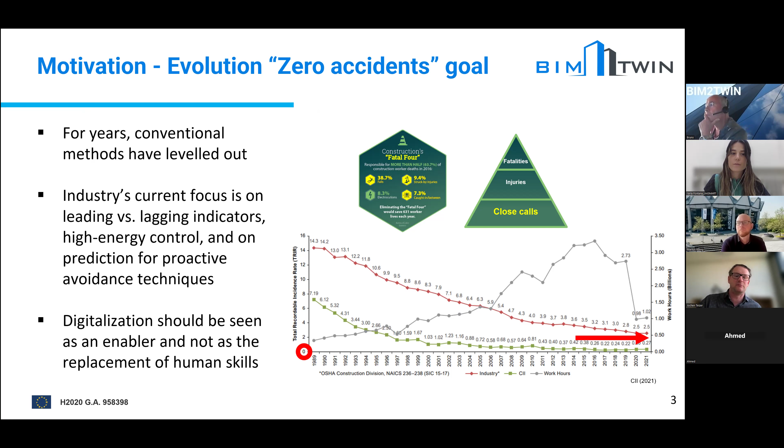Actually, it's going into high energy control events and actually also prediction. Prediction is very suitable for digital twins, as we know, as we can process data. And that will hopefully help us bring this curve further down to zero. As we know, safety has been leveling out for the past couple of, almost two decades now. We need to take the next leap and improve things. And that's where a digital twin really comes in handy.

To tell you a little bit more about the digital twin that we have built, I know this graph is very busy, but you have here a construction site. Actually, work package 7 in BIM2TWIN produces alternative construction plans according to the lean construction method. We can evaluate those alternative construction plans, let's call it schedules, and evaluate them for safety. So this is where we focus on artificial intelligence to evaluate safe construction plans for safety. We call this tackling the prevention through design and planning principle.

In addition, we also want to, of course, focus on understanding what is going on a construction site. That's where we have raw data streaming in. Here we focus on sensors, whether they are vision-based or wireless sensors or wearables that provide us with data about the workforce and equipment that's moving around. Even that data can be analyzed and used for predicting probably future events. So you will see a little bit on that.

Of course, we want to relate this information back once we check with according to rules to the end user, which is then shared again with the construction site. I think we have numerous publications among the entire BIM2TWIN team. I would encourage you to read up on that and maybe even contact us. But I'm not going into further detail. There are underlying business processes that we have evaluated in the BIM2TWIN project to really figure out what data do we need, what information can we generate, and how can this eventually be used as future knowledge.

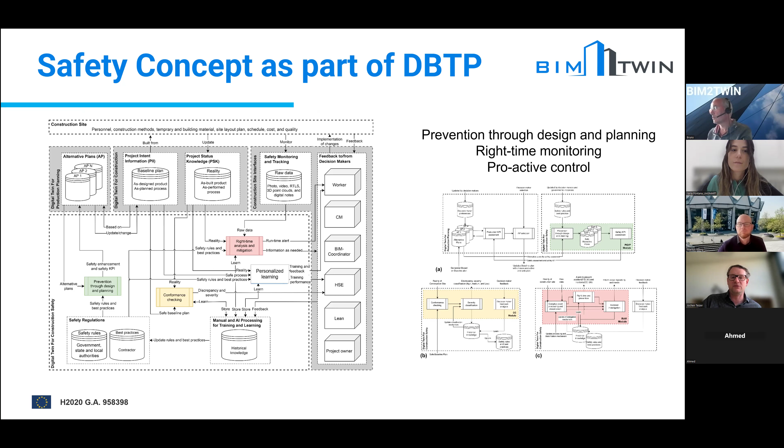So I'll show you two parts. One is the safety planning, and the other part is proactive monitoring and control. I'll stick just to those two. The objective of safety planning is to design out known hazards from construction scenarios, from construction plans. So often these relate to rules. I'll show an example in a second.

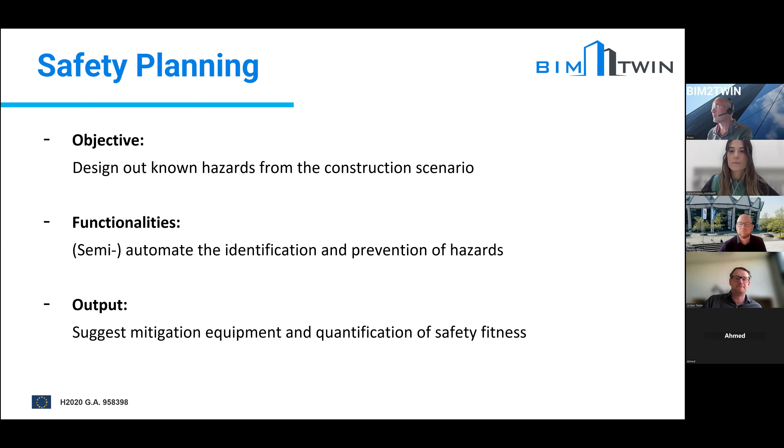And second, we want to come up with a semi-automated way to identify these hazards and actually eliminate them before we go into the construction phase. So, the output is then, of course, we want to almost automatically suggest mitigation measures, equipment, safety equipment that protects the workforce from getting hurt. I think if you understand these parts, then I can show you the next couple slides.

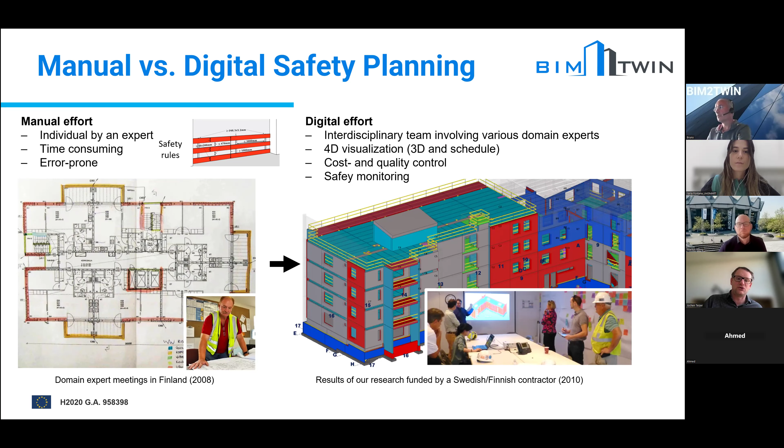This is how it's done currently, planning safety manually, like on a drawing. And yet we want to go to that phase where we actually utilize building information modeling, figuring out where fall-from-height hazards are and actually creating fall protection equipment automatically in a BIM model and linking that to the schedule. Now, to show you this, I hope you can see it, and the video is quite smooth.

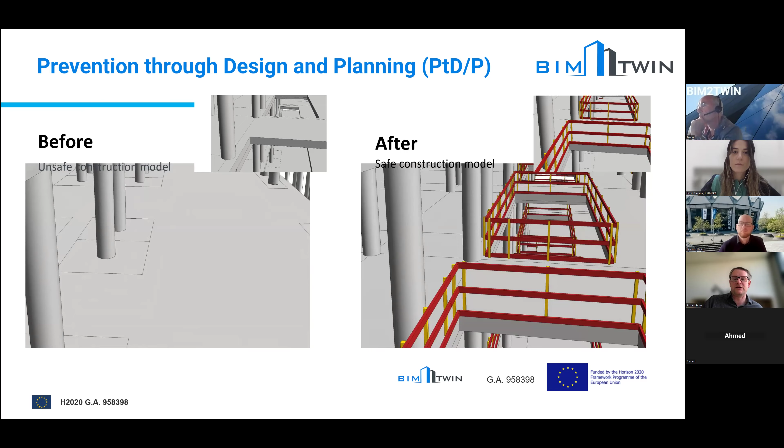Typically, you have this in a construction plan, a model, but it doesn't carry any safety features. So here we actually, once we run our algorithms, we can detect these fall hazards and automatically install these guardrails. And I think that's a first result or contribution that we've been making with our work package in BIM2TWIN: we can detect these fall hazards and either put guardrails there or other protective measures as the user wants to have.

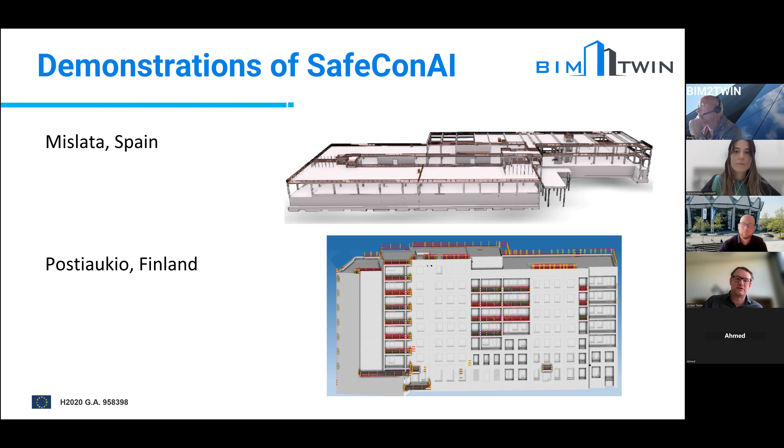I move here to the next slide. We have, of course, multiple demonstrator sites in the BIM2TWIN project. One is in Spain, one is in Finland, and we have applied these tools there to generate these safety plans, or safe building information models. So it's a very nice way to actually incorporate safety and leverage the already ongoing effort of utilizing BIM for construction projects.

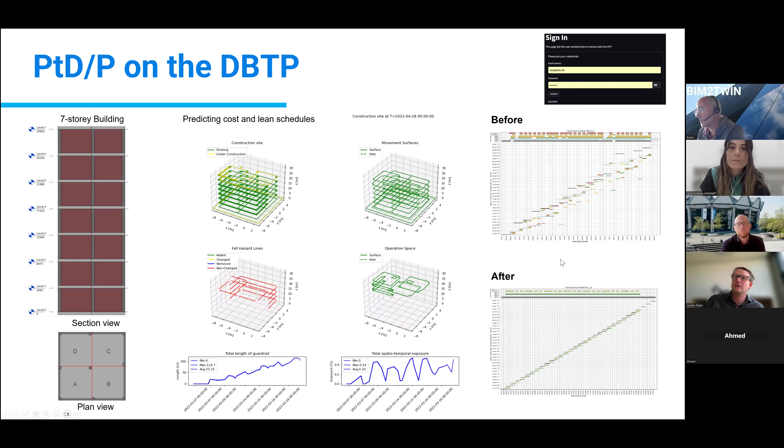I think this is some basic takeaways from what we've been doing in BIM2TWIN on the safety planning phase. We call our approach SafeConAI. And as it ties to work package 7, typically we have a construction schedule as shown here, and we know that this is probably not as efficient as it could be. The one below is probably a bit optimistic, but technically, based on work package 7 and our contribution, we can incorporate safety. It's very small to see here, but we include safety, so we know when safety issues occur and how quickly they have to be fixed. And likewise, we can streamline the operation and make it lean, reducing further waste. That's something that is a result of the safety planning part of our work package.

Going to the next part, having this plan here, it would be nice to actually monitor if we're performing that well as we initially thought. And here we have the objective in this part of the project of monitoring real-time safety as it is practiced on the construction site.

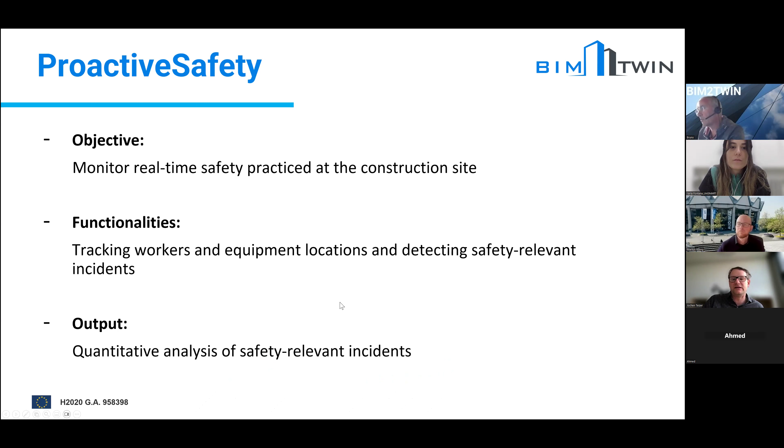So here we track workers and equipment locations and detect safety relevant incidents, and the output is a quantitative analysis of what has happened on the construction site. Let me show you a little bit of that.

Here you see a model. This is also a result of our safety planning phase. We take a model and enrich it with the work spaces. You see here in the light blue color, the work area of workers.

Here is a fall hazard because the work crew is walking on that end. You see there is no prefabricated wall element installed yet, so you can drop at least 2 meters, as we've experienced in a field trial on the site.

So workers could be exposed in that part of the job site to these falls. Now, how can we ensure that workers don't drop, or record that they don't get too close? We can put wearable tags on them, which we've done using RTK GNSS tags. These are tags that can track to centimeter accuracy where workers are, of course only in the outdoor environment.

It works like you set up a base station that provides the corrective signal, or you use an online service, that's also possible. But in this case, we developed our own base station and installed it. Likewise, we also installed a camera on the crane hook, on the trolley, facing downwards.

This was to also figure out, can we detect using computer vision any workers below a heavy load? Because of course we would also like to avoid that. You will later see more from Markus about computer vision.

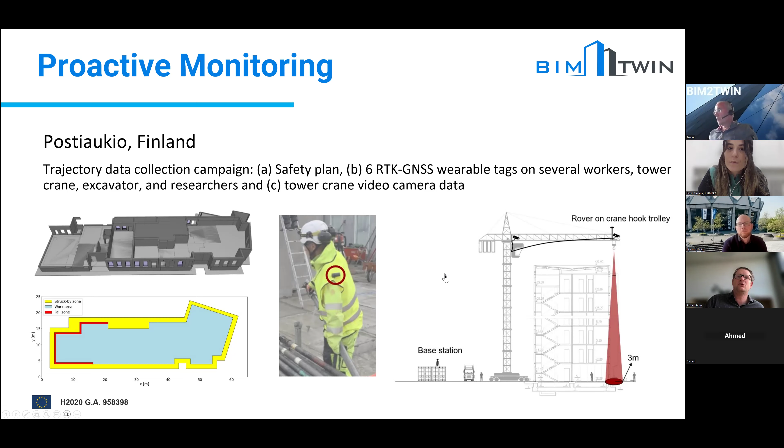I'm not going into that too much, but this is raw video footage or images from the video footage. And then there are algorithms, initially provided by a partner in the BIM2TWIN project, that can process the raw footage and detect workers just below a crane load.

An incident you see here is probably that this worker might be exposed to this load hanging from the crane hook, and we want to avoid that, so they stay away. And that's exactly what we can do.

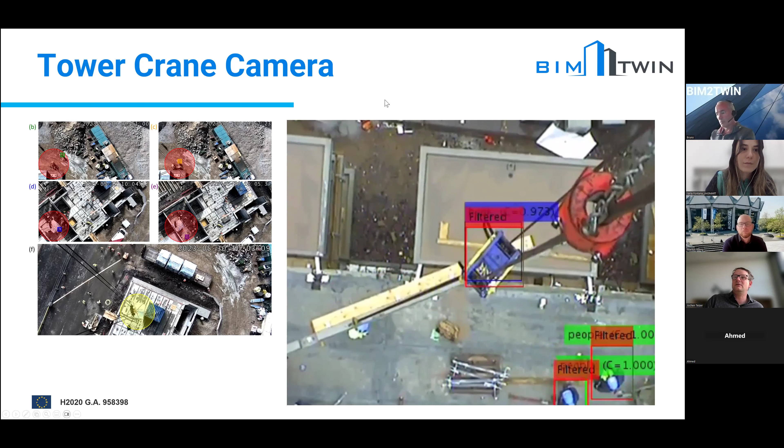Once we have georeferenced these images, we can map all the trajectories. So this is from the RTK GNSS data, all trajectories - this is from just 5 workers, all their trajectories throughout one day.

And you see their work area. So you can quite easily figure out visually that they have been working quite a bit in this domain.

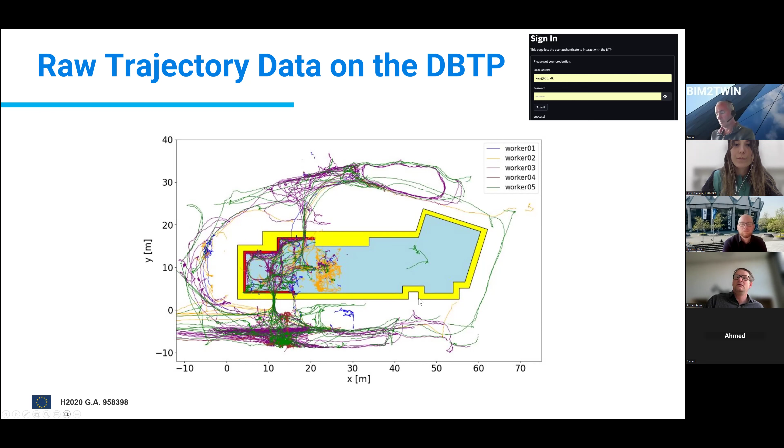And likewise, the crane hook can be visualized because we also have its position, since we also installed an RTK GNSS tag on the crane trolley. And we can bring that into relation to the work crew.

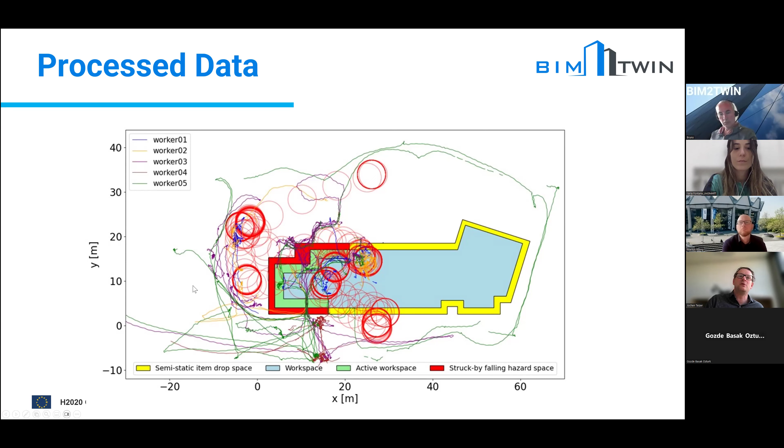Of course, here's another way to display it. You see it here on a plan view of the safety enriched BIM model. You see these locations, whereas the yellow ones...

...maybe not as serious. And of course, you're able to get a lot of data about the workers, like who of the workers was exposed at what time, and so on.

Now we're still in the process of analyzing how such data, or such information, can be shared with the workers in a better way. But our goal here is to use active personalized feedback, where we directly approach the individuals and tell them how important it is for their own life to ensure safe work practices.

I think this is it from my part. Of course, we have a lot more statistics about a job site and its behavior, but I think you get a glimpse of what is nowadays possible once you use technologies, Internet of Things, or sensors that provide data from the real construction site operations.

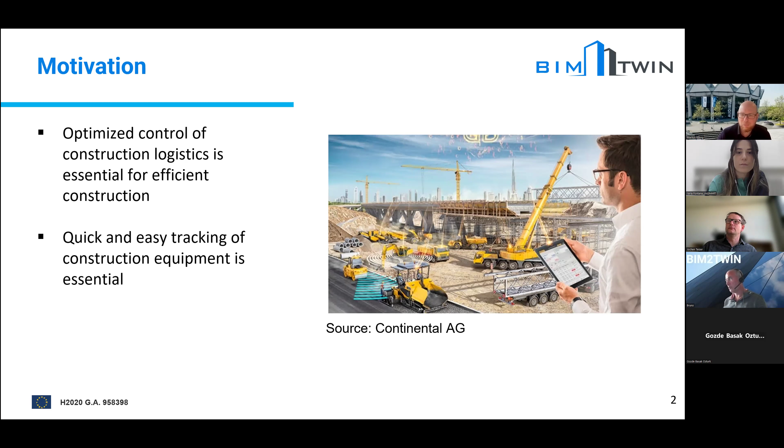So mainly I'm talking about tracking and monitoring of construction equipment at the moment. Several technologies are possible here. Sometimes you have machines with already installed sensors, so you can collect data directly, but very often we have equipment which is not that intelligent or digital, so you have to monitor it in a different way. Also here we are using computer vision based methods, installing a camera somewhere on the construction site.

Then starting the recording, try to identify where the equipment or machine is, the way the machine is moving along the construction site, what the machine is doing, and then transfer all the information into our digital twin platform and try to analyze them.

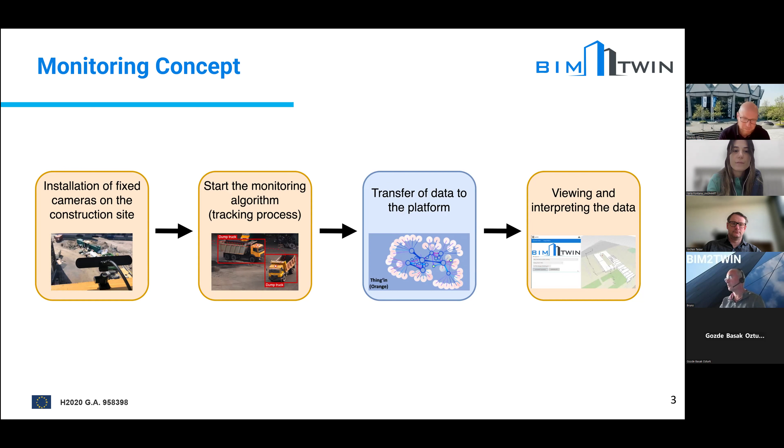And as Jochen mentioned, everything is about making the whole operation more efficient and safer. And in general, we want to update our schedule. This was also part of the BIM2TWIN project, but it's not the topic of today. So I want to go into more details and show you some of the results.

Actually, the main idea is to find out where the machine is located, so really to calculate the coordinates of a machine, or maybe also a worker or other equipment. Then, if we have a video with different images we can analyze, we can calculate trajectories from an object, so where is the direction the machine is moving.

And of course it's also very important to check if the machine is in a so-called working zone or different zones on the construction site, so we can say there is some construction work going on, the machine is unloading or loading something, and maybe then moves to another part of the construction site. So we are concentrating here in the BIM2TWIN project on different

equipment types like excavators, concrete mixers, trucks, rollers, excavators, also tower cranes and mobile cranes and so on.

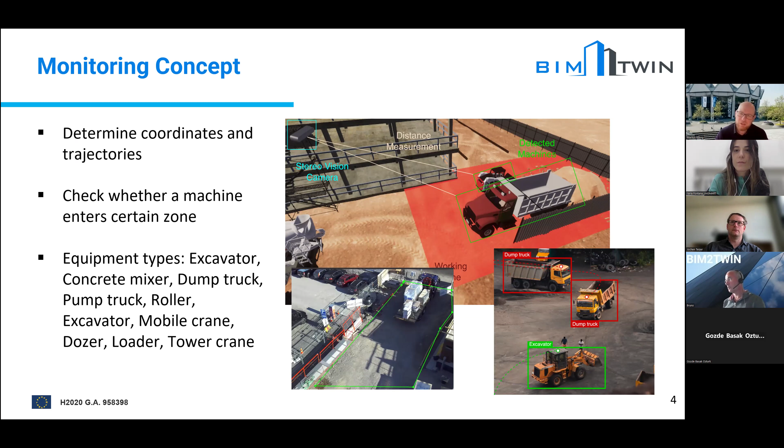So that's always a bit of a challenge if you use computer vision and want to detect a certain machine - you have to train your model for this certain type. If there's a type not trained in our machine learning model, then we cannot detect it, so this is always a challenge. Therefore, we collected a lot of images from different countries and different manufacturers to make a very robust estimation to identify the machine and also detect the movement.

If we have this, we receive an image and check if a certain equipment appears in it. We also look up a list of possible equipment that's scheduled or planned for the construction works. So if you detect a certain type of truck that wasn't really planned to be on the construction site, you get that information—maybe there's a wrong configuration or a modification in the usage of equipment. There's always a list of equipment behind this, and we check if this equipment is supposed to be used on the construction site.

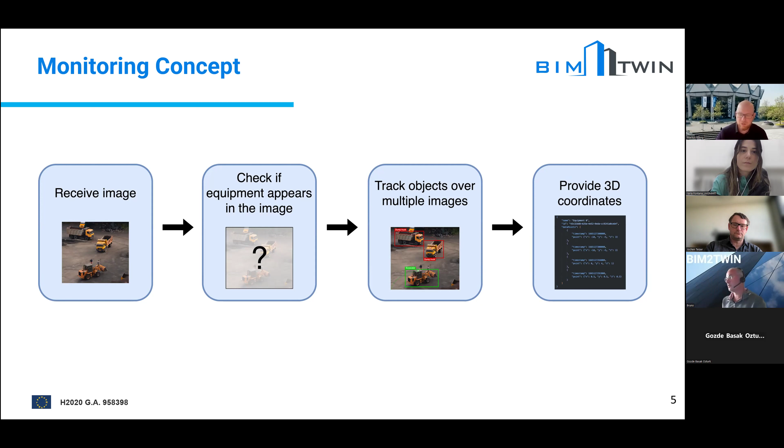Then we can also track these different objects in different images of different parts of the construction site, and we provide mainly the coordinates and the type to the digital twin platform, and then we evaluate these results. So this is what we developed—some kind of algorithm.

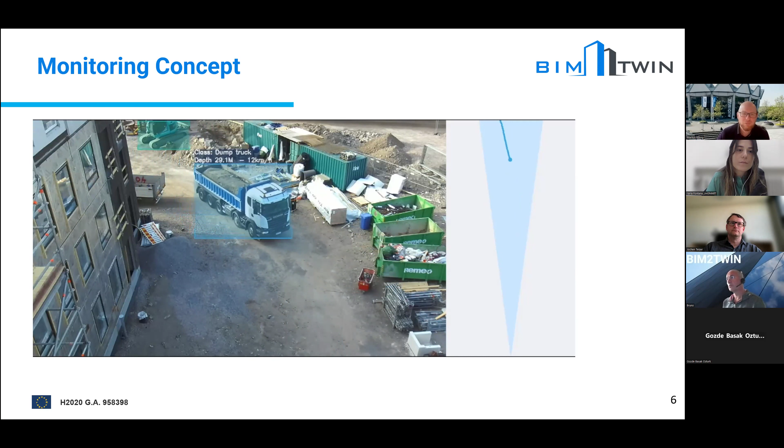We put the camera on the construction site, also on our pilot sites in Finland and Spain. You can see it's classifying a dump truck, and you can also calculate the speed of the truck and the distance between the camera and the truck. This can also be shown on the right side—this is the movement, and this is the camera view. We can also do this for an excavator moving in the background, and this we can achieve mainly in real time.

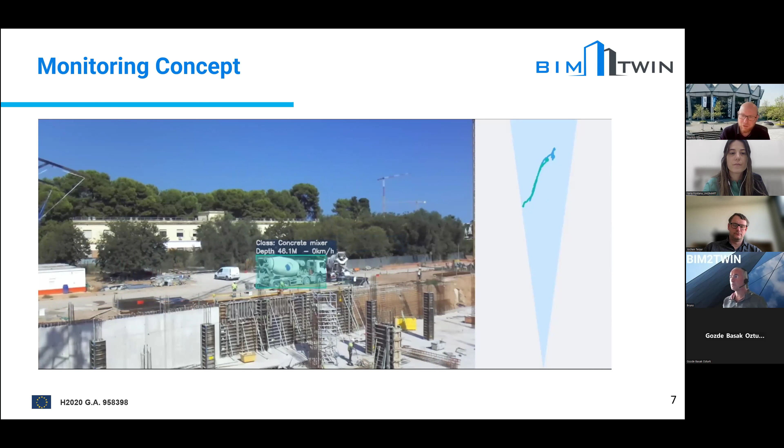Here's another video. You can identify if an equipment is moved to a certain position and stops there, meaning construction work is planned there. Then you can estimate, okay, now maybe there's an unloading of this concrete mixer here. So from the detection of the equipment, you can also forecast what the main activity might be. You can try to analyze if material is really coming out of the machine, but a good estimation is always: if it's at a certain position and work was planned for that day, you can estimate they are really doing the work at the moment.

We can also show the trajectories of machines and workers, as Jochen showed in his slides. Here we try to find out where the construction area is—we walked around trying to detect elements like the trench and the fence, and then we get a trajectory: here's the location of the construction area and the construction site. I'm only showing some of the lines here, showing a dump truck coming in and an excavator, or a certain machine moving into a zone for pouring or cleaning objects. So you can always analyze all this information.

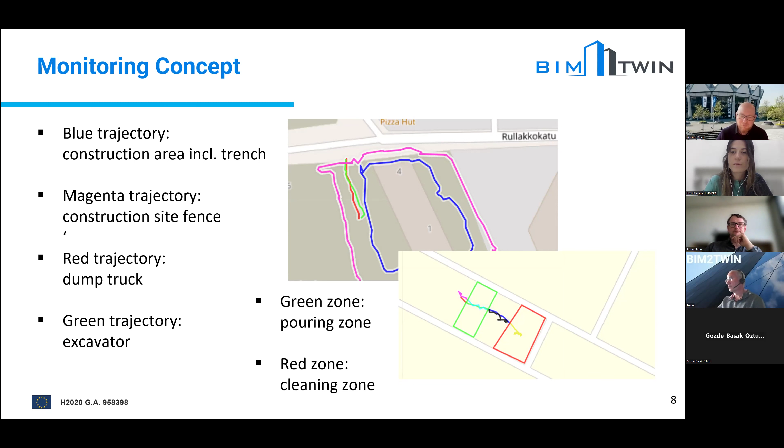We are collecting this data every second or more often, so in real time there's a lot of detail you can take out of this data to analyze.

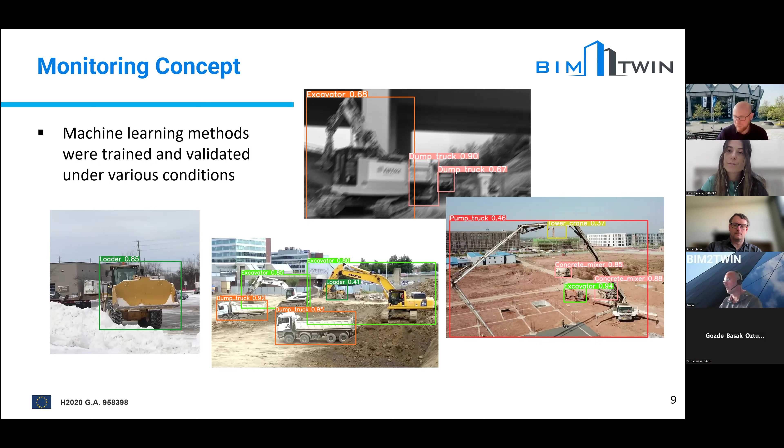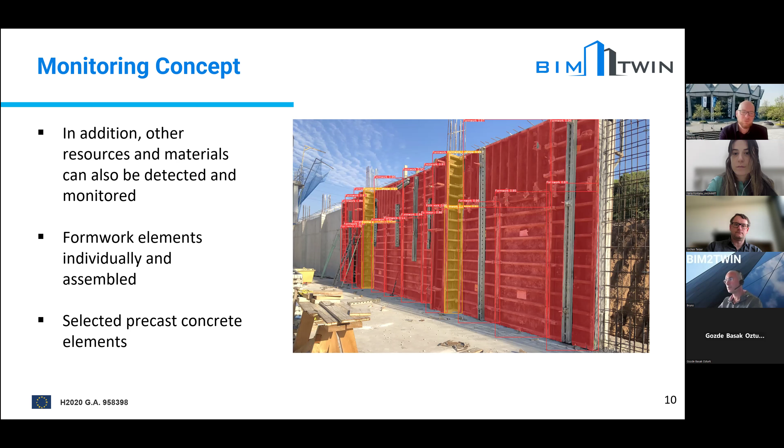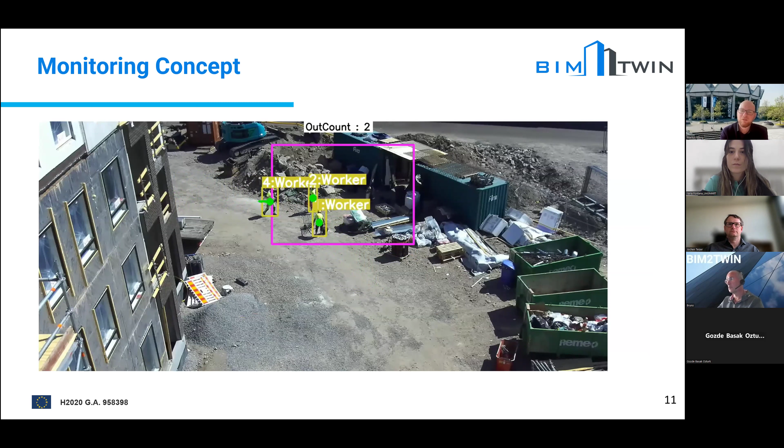However, you can also apply this for other resources and material. Here we can also detect, for example, formwork elements, single elements and assembled elements. And of course, we also did this for selected precast concrete elements on the construction site. And of course, it's also possible to apply this to workers, as Jochen showed us. So it's also possible not only from a top view—you have to train it from a side view too, so you get a good overview of what is going on at your construction site.

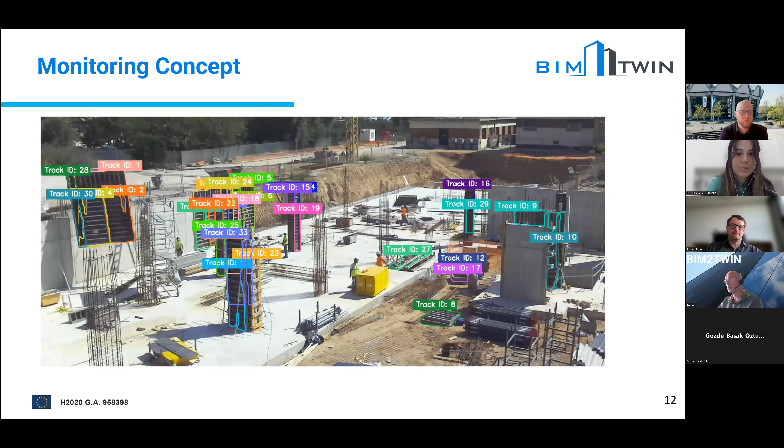Here you see the tracking of the single formwork elements. Sometimes it's not so accurate, but actually maybe we only need the information that there are several elements—maybe an assembled big element, a group of elements. But we can also detect which individual formwork elements are now connected to a bigger one. So this is also possible.

However, of course, for formwork elements, it's highly dependent sometimes on the color of the elements. You have different manufacturers with different colors. You only have to train it for different colors for it to really work.

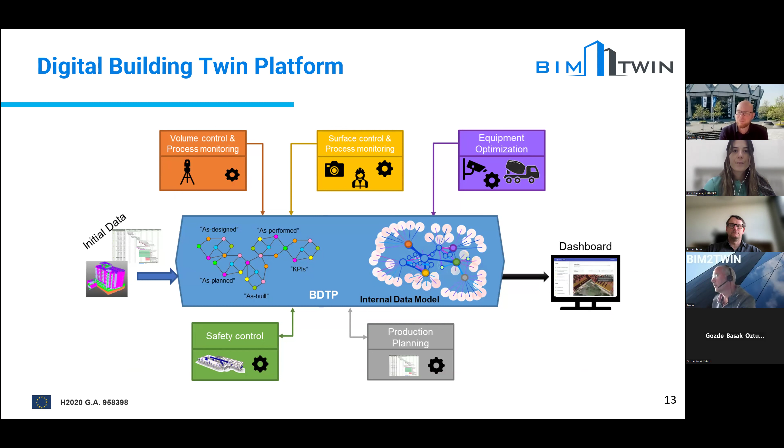Now I'm coming to our digital building twin platform. So as Jochen already mentioned, regarding quality control, safety, and production planning, we also want to upload our information, our data, to the platform, and visualize this in the dashboard. Of course, this is also possible.

You can just analyze this like you're doing with Excel. So, where are the positions on the site? What are the quantities? What is the utilization rate? And so on. So you can really analyze all the data and find out if you have some points where you can optimize the next construction works for the next months.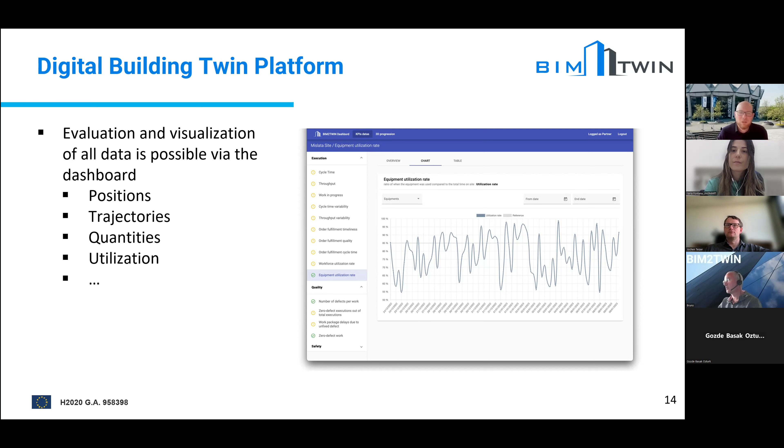Or you can highlight some machines which are maybe no longer necessary to use anymore, because maybe the construction itself is a little bit slower. So it depends on your questions and what you can get out of this, but we provide all the information, all the data, via the platform, and have different possibilities to aggregate the information in charts like these.

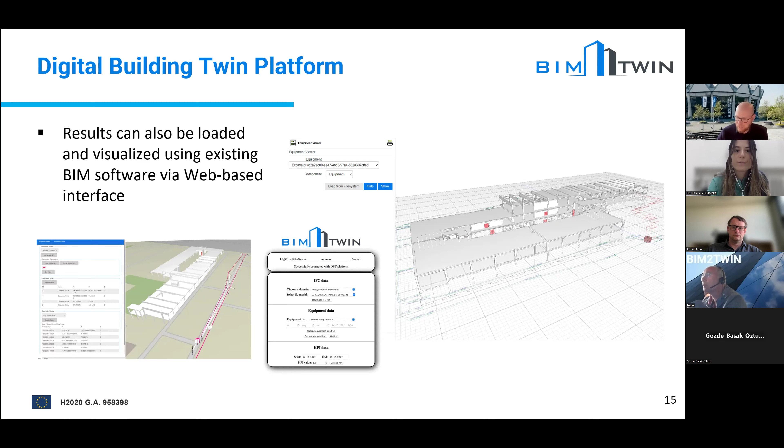However, it's also possible to connect the digital twin platform to other tools. So we also developed a so-called web-based interface, so that an existing BIM application, for example, can just connect to the digital twin platform, download the information, and visualize it in a BIM viewer or another tool. I will show you this in one tool we very often use in Germany. It's called DesiteMD. So it's quite easy to connect to the digital twin platform—just download the IFC files, download all the information.

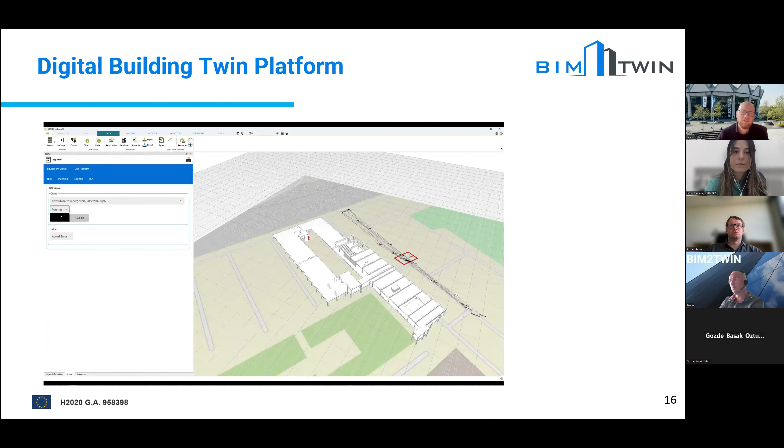Here you see different areas and also the position of the machine. You can also visualize this with simple lines. And of course, you can also do some querying using these more complex BIM applications.

So what are the lessons learned and next steps? Of course, video-based methods can be easily used if you have the training data. So it's very important that you have good images, for example, for training your models. Then you can really monitor construction equipment, because it's quite easy, since this is an object with fixed dimensions. So for machines, it's quite easy.

However, for other resources, it's a little bit more challenging, like for formworks, maybe scaffolding. Because it's assembled of separate tiles or single elements, it's getting more and more complicated to detect these elements and analyze them. However, it's also possible, but we still need to train our models a little bit better here.

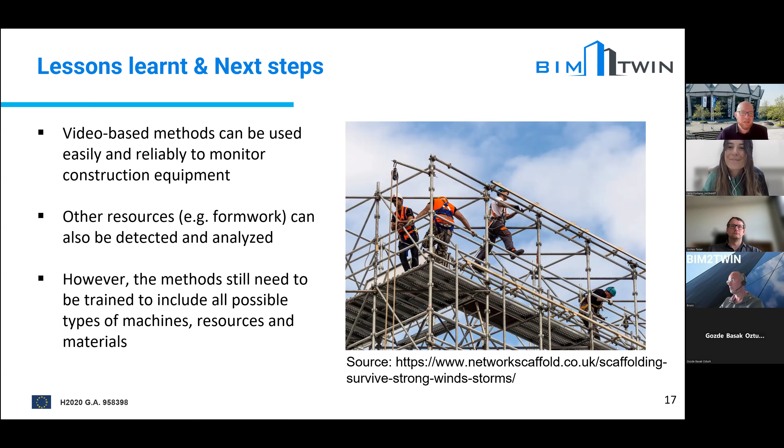And of course, if you have a new machine, new resource, or new material on the construction site, you have to train it again and again. However, sometimes it's possible to transfer some experiences from other training processes to new training processes of the machine learning models, to make it a little bit faster. However, we are still working on that. So, thank you for your attention also from my side.